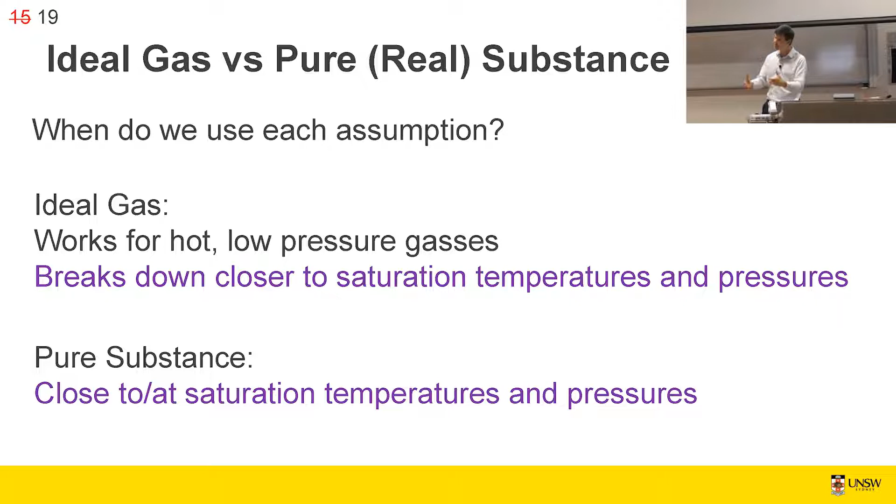We consider water a lot, A, because it's very important from an engineering standpoint, and B, because you have some experience with water. So examples of pure substances: water. I'll talk a lot about water today. We'll talk about refrigerants later.

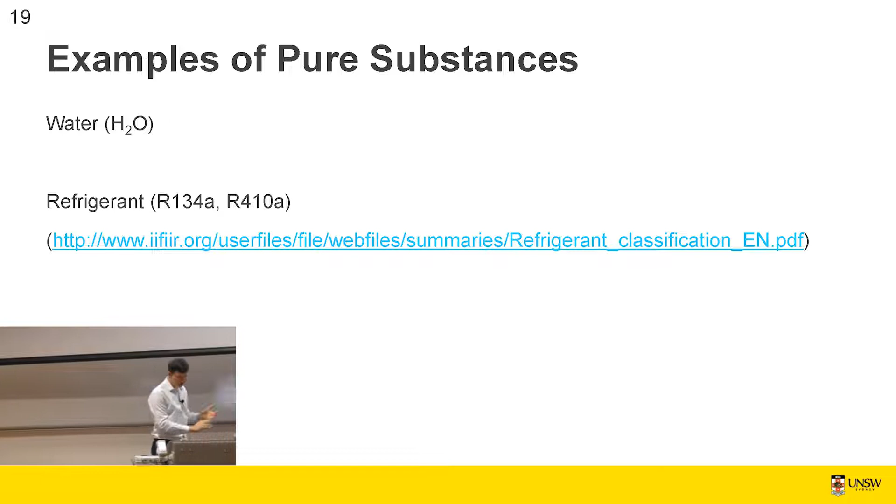But refrigerants, and I've listed 2 of them here, there is a naming guide published by the IIFIIR, it's like the International Institute for naming refrigerants. So they're fun guys you want to invite to your party. But that says what the numbers are. You can reconstruct what the molecule looks like from the R number, and that document would tell you how to do that. We won't really go into that. We'll just use the refrigerant and the refrigerant data as it stands.

So this is liquid. This is water at atmospheric pressure. Okay, so let's do a thought experiment. At 1 atmosphere, let's take water from something cold, and we know it's liquid. At 20 degrees, we're going to add heat in the form of a very powerful candle. And we're going to go from 20 degrees C to 100 degrees C. Okay, and through this transition,

The water is rising in temperature and it's slightly increasing its volume. Water gets slightly less dense as you go from 4 degrees C up to 100 degrees C, but it's still water, okay? Then we're going to keep adding heat, and like my kettle on the floor, the water is still at 100 degrees C, but we start to boil off some steam, and this steam is also at 100 degrees C. Okay, so you've got 2 phases.

So this would be called the point of saturation. This would be called a mixture. This would be called a compressed liquid, or a supercooled liquid. It's in a supercooled state, but we often say compressed liquid because it's not very cold, 20 degrees, so it can be a confusing term.

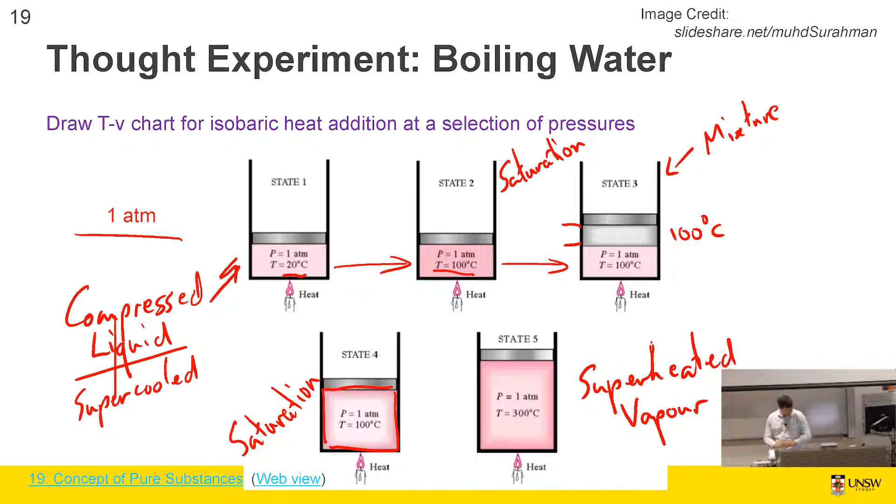So if we looked at that on a T-v chart, temperature and specific volume, cooler, good. So where do we start? We started at 20 degrees C. The density of water is around about 1,000. So the reciprocal of density, being specific volume, is around about 1,000th.

So my chart just happens to be appropriately, the axis is appropriate. Now, when we increase, so we're adding heat, right? We're going to start at this state point, down here. We're going to add heat, and it's going to slightly expand. So the specific volume is going to slightly increase, the density is going to slightly decrease. Probably not even that much, till it gets to 100 degrees, right?

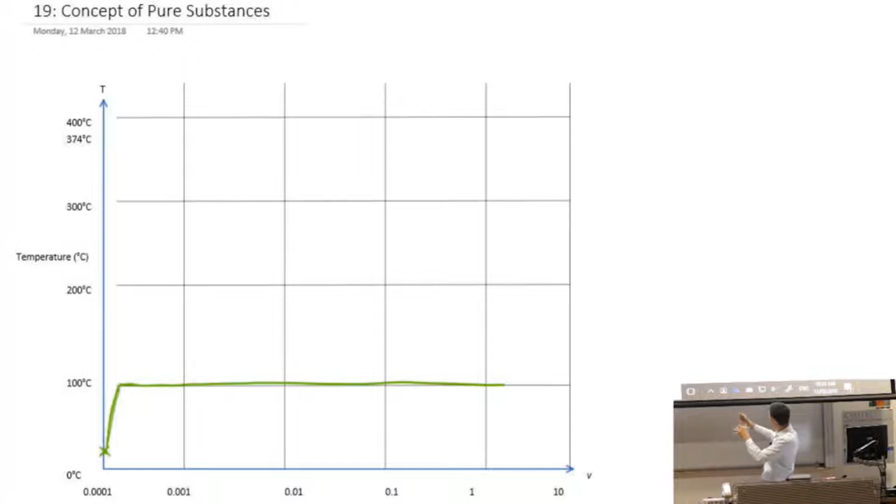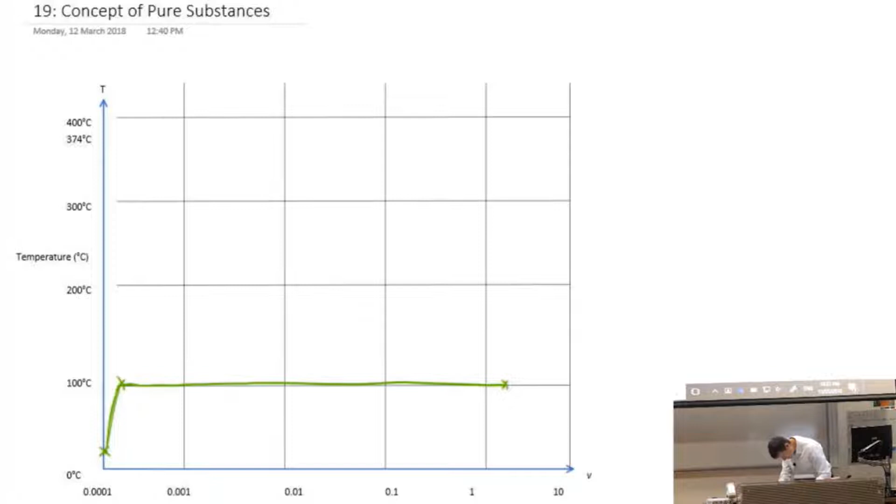And then it's going to expand, and indeed, so this is logarithmic on the x-axis. It expands all the way up to about 2. It expands a lot, and that's important too. And then, so this is our point of saturation again, our points of saturation. And then as you add more heat, the temperature rises, so we're no longer constrained to be 100 degrees. The temperature rises, and it also expands, continues to expand, and does something like that. On a logarithmic chart, it's a bit hard to get right.

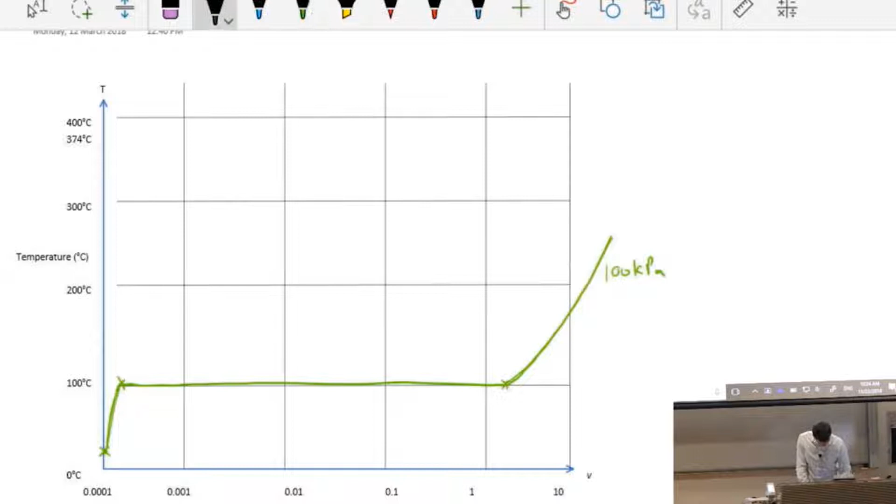What would happen, so we'll draw that. This is an isobaric process at 100 kPa. What would happen if the pressure wasn't 100 kPa, but was instead 1 megapascal?

If you take liquid water at 20 degrees C from 1 atmosphere to 10 atmospheres, right, so we've increased the pressure by tenfold. It compresses. Does it shift it up? You're getting good, you're getting close. It compresses just a tiny bit, but not very much, all right?

It follows a pretty similar line, just a little bit to the left, but a fascinating thing happens when it gets to 100 degrees. And that is nothing at all.

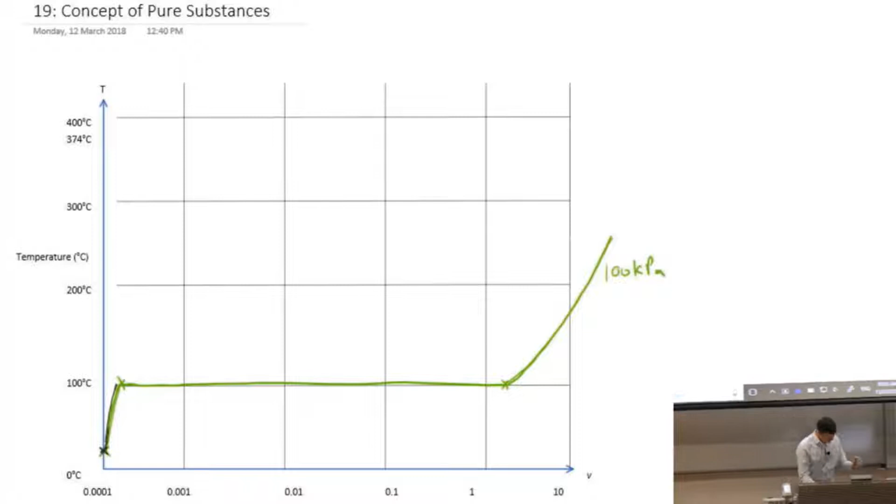Liquid water, so we're drawing a 1 megapascal line here. Liquid water at 1 megapascal continues up to about 180 degrees, and then it starts to boil. And it has a boiling line that goes like that, okay? And then, because it's so highly compressed, it's not quite as big when it's all boiled, and then it goes like that. Is anyone surprised by that? Did anyone know that?

Yep, good, all right. There's an interesting video, it's too long for me to post, it's like 9 minutes long. But it's guys who boil water at various points as they climb Mount Everest.

And you get the opposite effect. So at base camp, water boils at 80 degrees C, right? And that's related to atmospheric pressure as it changes.

Now, you could imagine that then at 10 megapascals, let's draw a 10 megapascal line. At 10 megapascals, you get a very similar point there. It follows a very similar line up here. Let me refer to my textbook. I've forgotten. Cool, no worries.

And then, at 310 degrees, nominally, the water starts to boil. Boil, boil, boil, boil, boil, all the water's boiled. Saturated mixture between those 2 points, and then it goes up. And that's your 10 megapascal line, MPa.

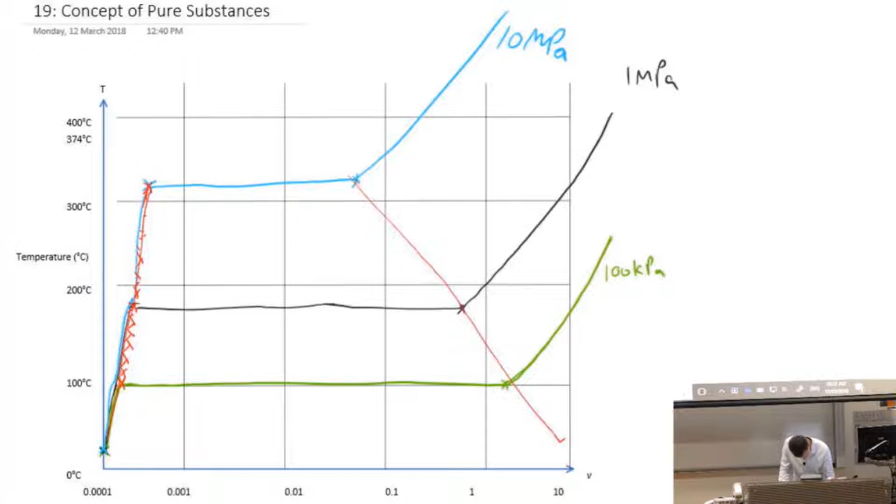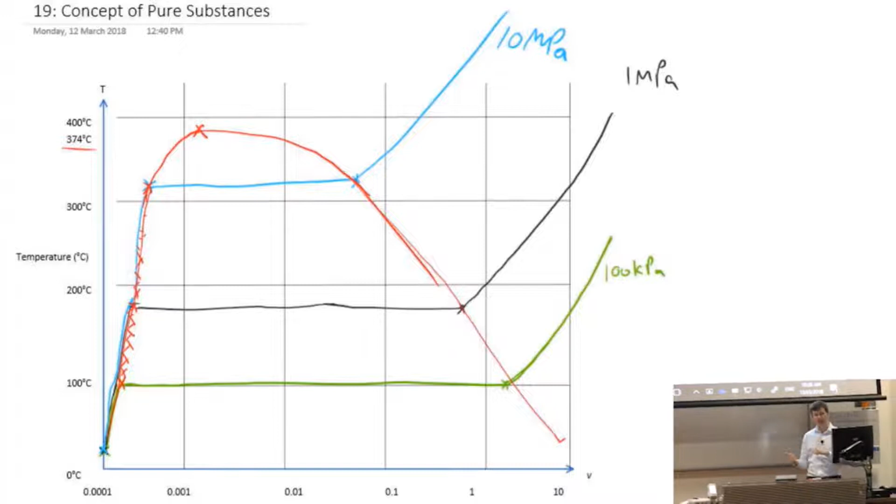In fact, those lines intersect, and what kind of chart has 374 written on it? That's just weird. And in fact, they look like that. I'm going to cut across to a more professionally drawn version of this, but I wanted you to see how it's developed. We'll talk about why pressure influences the boiling temperature of water as we go on. I'll tell it to you a number of times in different ways in the hope that it becomes intuitive.

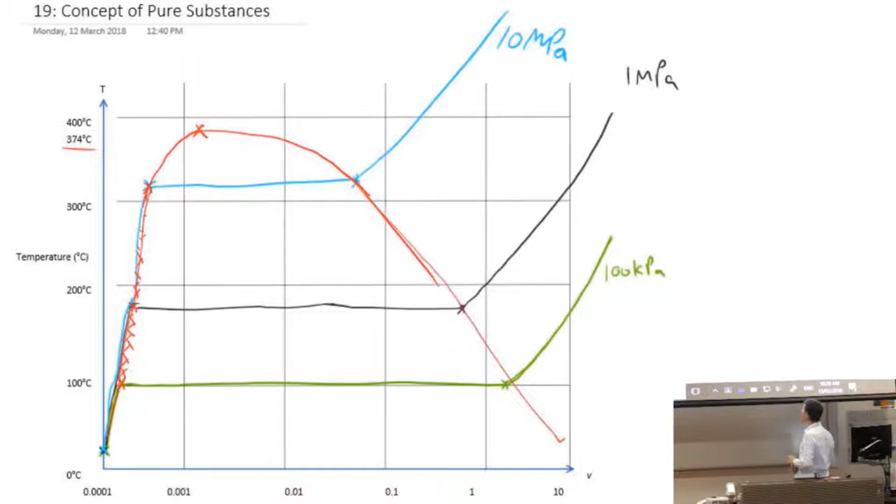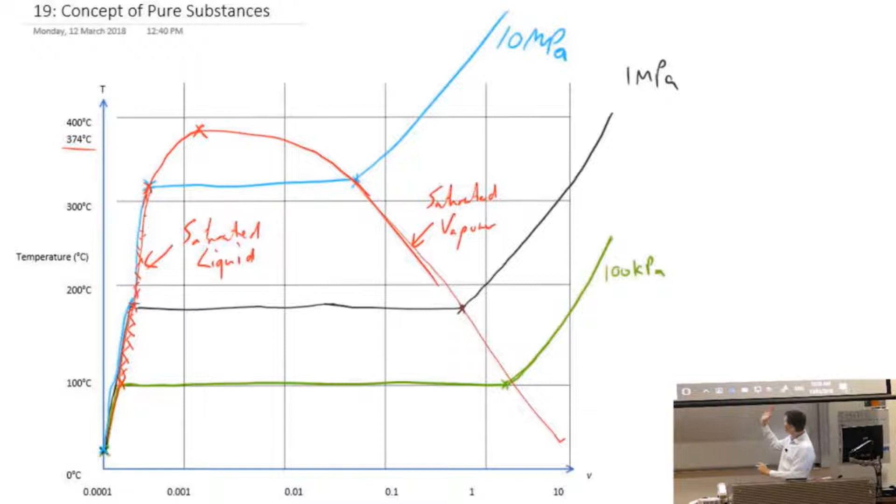This line here would be the line of saturated vapor, and this line here would be the line of saturated liquid. To the left-hand side of that line, it's all liquid. To the right-hand side, it's all vapor. This would be the zone of mixture, where some of the substance is vapor and some is liquid. We'll talk about that point there, and there's a line down here we'll talk about as well.

Excellent. Are there any questions, thoughts, concerns, comments? Go. Why does it shorten? Why does it shorten? Yeah, no worries. Yep, I agree.

So the question is, the length of this line gets shorter as the temperature gets higher, right? Because this is temperature. The reason is the length of that line is the difference between the density - specific volume, but I'll use density since we're more familiar with it - of the liquid water when it boils and the density of the vapor when it starts to get superheated. If you imagine lots of pressure pushing the particles closer together, then even as a vapor it has a higher density. This direction is higher density. And so vapor at 10 megapascals, as it approaches all being vapor, is pushed together, so it's there.

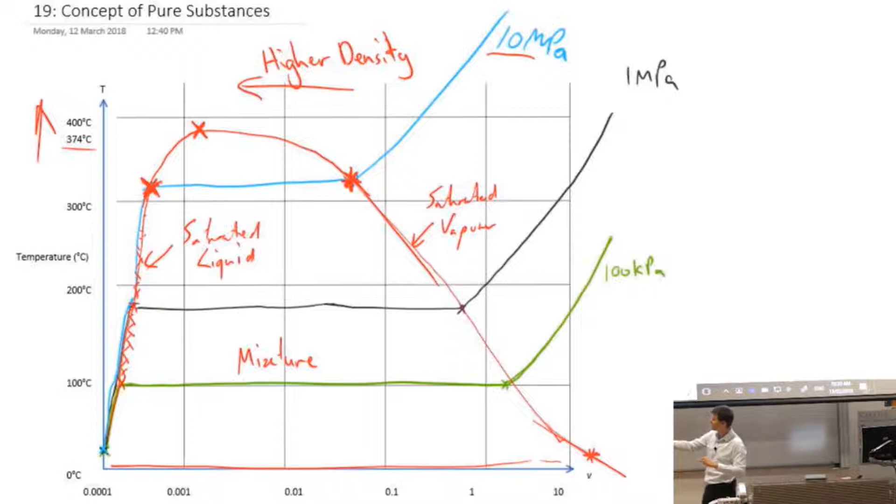The alternative would be at like 5 kilopascals - I'm talking absolute pressures here, not gauge pressures - so we're talking 95% evacuated vacuum. You could imagine that water vapor actually is quite rarefied; it's not very dense at all at the point it becomes vapor. So yes, that line shortens, and it has implications for us. The length of that line is a representation of the energy required to boil the substance as well. So that becomes important. Good question.

And also? Oh, no, let the lad behind you talk because he rarely talks. Why are you starting at 0.0001? 1 over 1,000 is 0.001? Oh, because I'm not good with logarithmic charts.

What? Did I mention we were going to go to a professionally drawn chart? It's a good question, thank you. And your question was the same thing? No, what happens above the graph? Good question. What happens above the graph?

Right, so at a temperature of about 374, 374.14 from memory, you get to what's called supercritical. This point here is called the critical point, which I'll denote CP, critical.

Let's talk about atmospheric air. At atmospheric temperature, you can't compress atmospheric air enough to make it a liquid. So there is a temperature above which - for water it's 374.15 - no matter how dense you make it, going to the left here for higher density, those molecules have too much energy to bond as a liquid. Above this temperature is called supercritical, a temperature at which, no matter what density, you'll never get liquid water condensing out of your substance. So in fact, the compressed liquid region is below that line, and the vapor region is this region inclusive of the space above here. It's a good question, that's the answer.

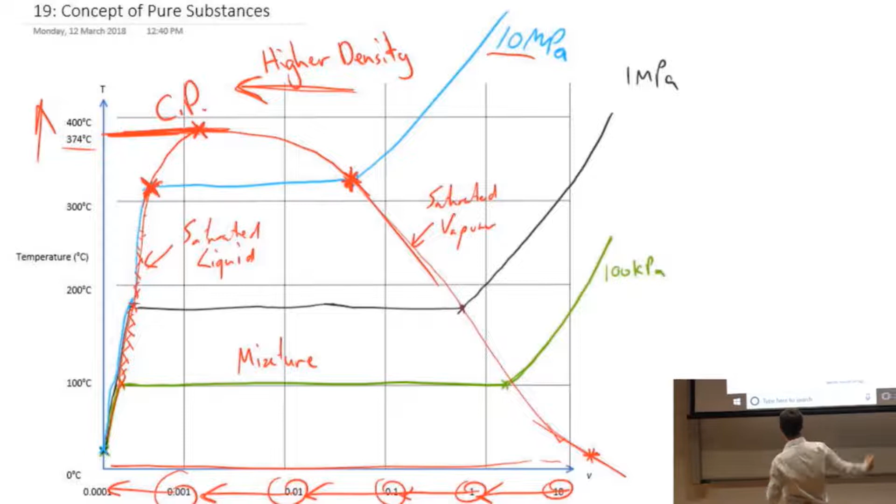What happens up to the right of the chart? No worries, yes you're right, it's logarithmic. So out here in this space, you need to be really low pressure to get there.

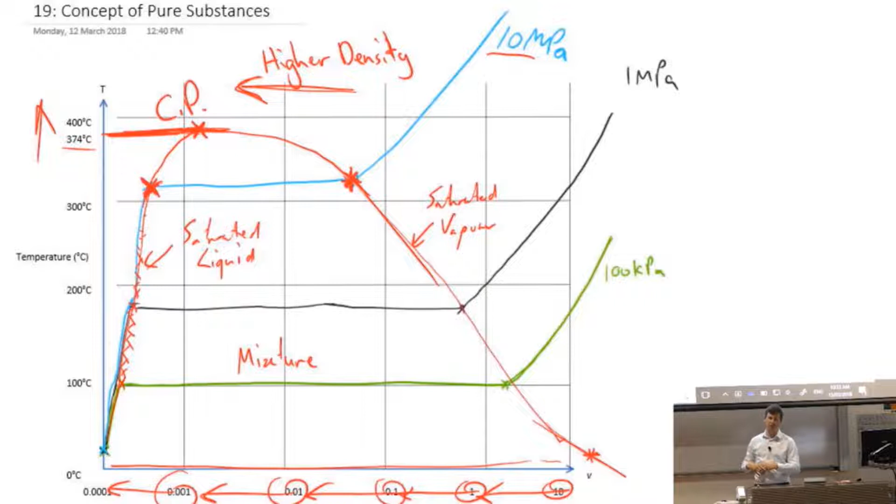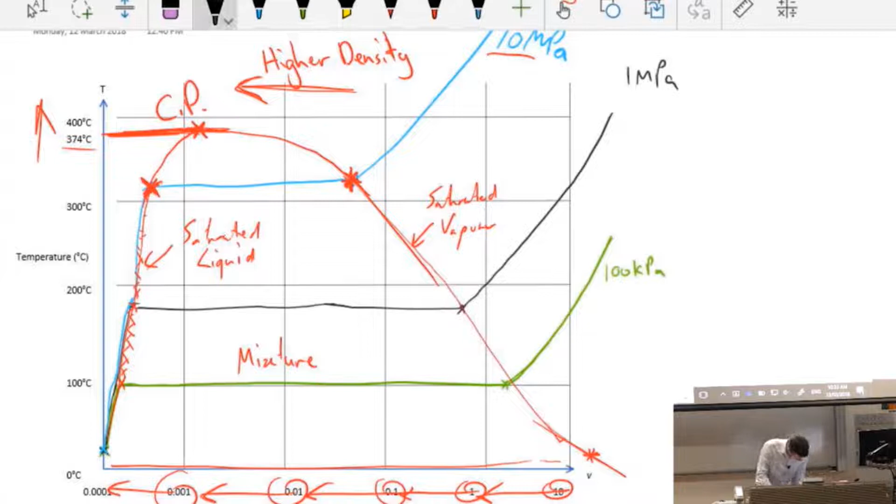If we did a 5 kilopascal line, I feel like I should do a 10 kilopascal line instead, because that would be an order of magnitude below our 100 kPa. If you did 10 kilopascals, it would look like that, it would go there, and then like that, and that would be 10 kPa, okay?

To start to get into this region here, so you've got really low density at really low temperatures, you need quite an extreme vacuum, right? And I guess there's some, well, is there some sort of limit? No, you just get really rarefied air at low temperatures. That's low density, low temperature.

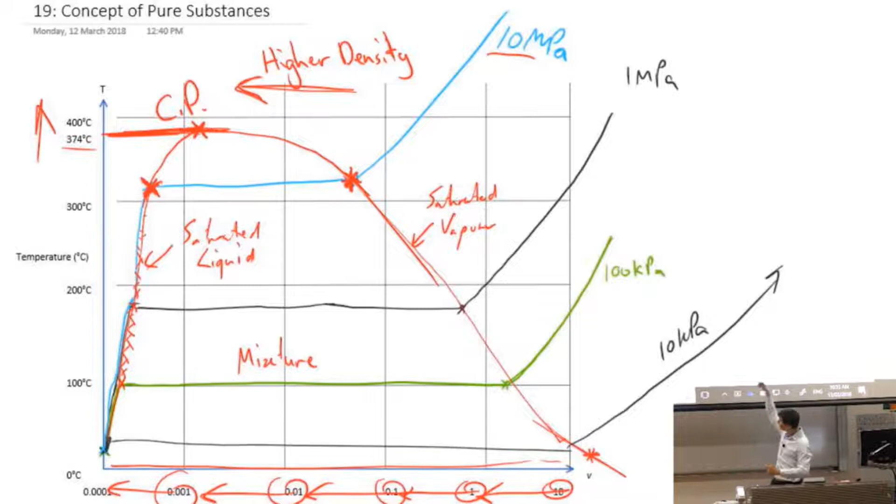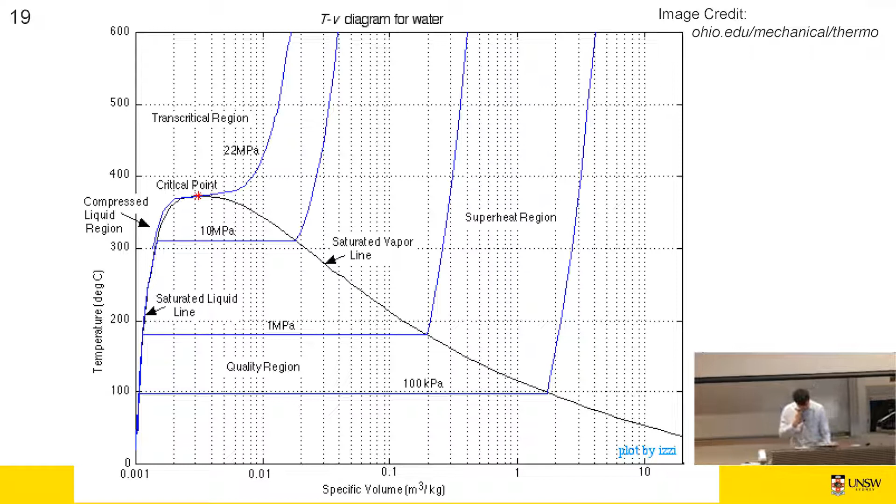It's a good question. This is a chart drawn by someone else using a computer, so I would suggest that everything's a bit better. Oh look, he starts at 0.001 - that's just, you know, he knows how to divide by 1,000.

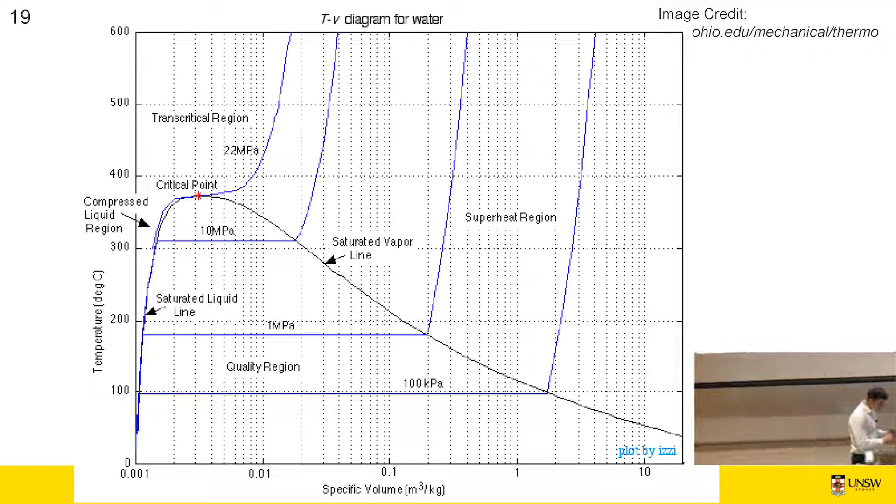So it's the sort of thing that we've talked about, right? I just want to point out a few things, okay? So subcooled or compressed liquid. Subcooled meaning if you add a little bit more heat, it's not just about to boil, and that is the region off here to the left. So anything there would be called subcooled, right?

Saturated liquid, and indeed the saturated liquid line is so labelled here, is the line describing when a subcooled liquid becomes saturated. So it's just about, if you add any more heat, it's just about to boil off some vapour, okay?

Quality region is in the middle here. We can call that a region of mixture, or the quality region, because if you look at the length of this line, from that point to that point, you have some point along that line - let's arbitrarily choose a point that occurs at 100 kPa.

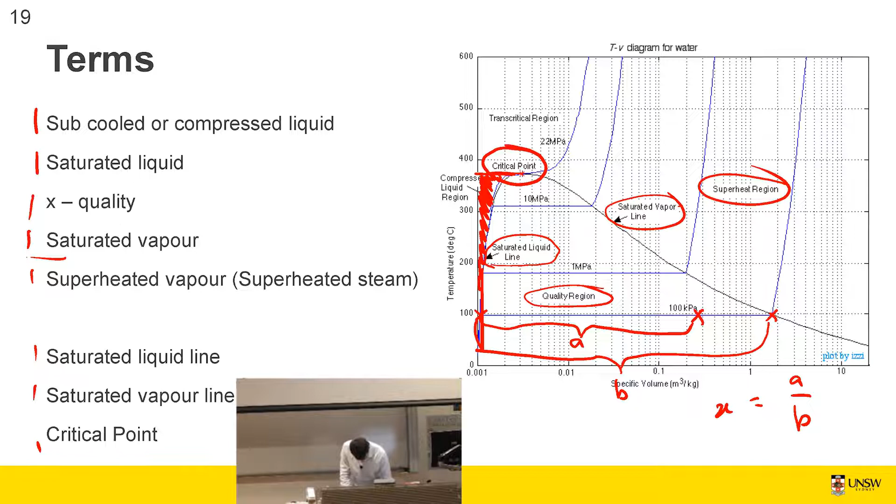If you divide that number - this is length, length in millimetres if you're reading a chart - if you divide this number, let's call it A, by B, x equals A divided by B, right? Then x, and x is the letter that's used, all right? I'm not making this up, x is the letter that's used. We will define x as the quality of the mixture, okay?

So if A was almost the same as B, then the number would be about 1. If A was really, really short, then the number would be about 0. So x is bounded by the numbers 0 and 1. We'll talk about quality soon. But where the substance is along that line is quality x, and we use it as an intermediate variable for some of our calculations. Cool.

Superheated vapor is this superheat region up there. Sorry, my apologies, that says saturated - saturated vapor line, superheated vapor is the region over there.

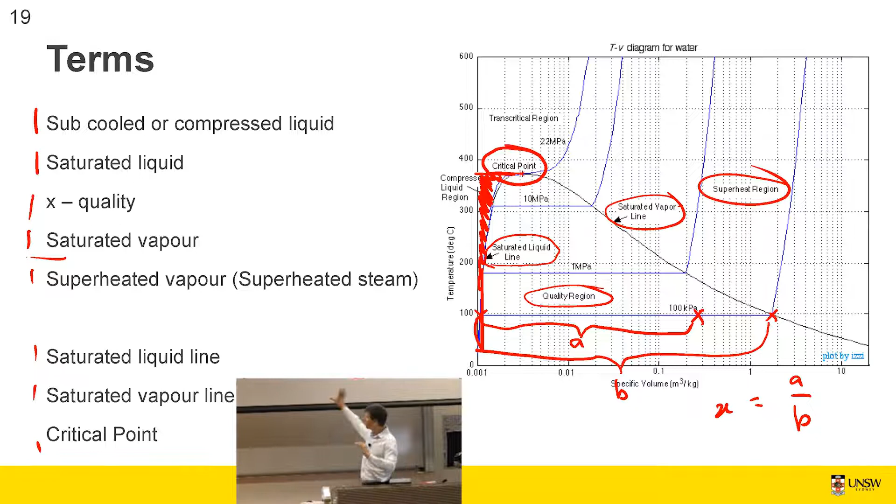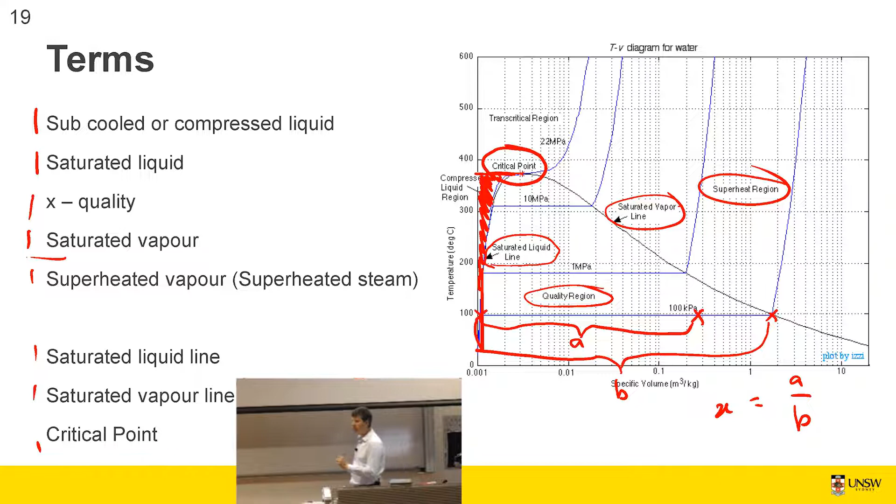We talked about the lines, and we mentioned the critical point as well. The critical point is so labelled on this graph up the top. It's the temperature at which any higher temperature cannot be compressed into a liquid at all.

Excellent, just a more formalised version of that. I want to tell you stuff a couple of times.

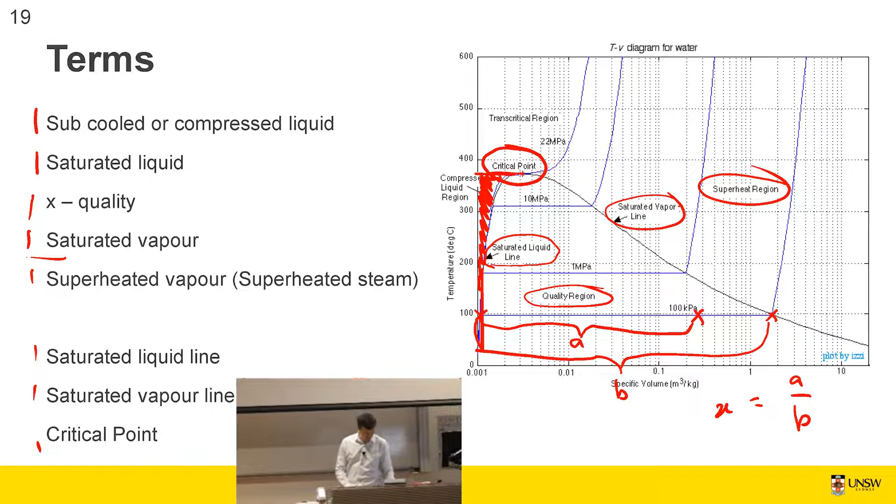If we did something different, if we took water at 100 degrees C, okay, so this is isothermal, and we compressed it from 50 kPa, so it starts as rarefied, so it's all superheated vapor. Notice that the word superheated means it's all vapor. 100 degrees C, you're like, that doesn't sound superheated - no, it's a defined word that means it's all vapor, right?

If we lower this piston to such a point that the vapor is now at 101.3, or atmospheric pressure, at 100 degrees, so now it's saturated, all right?

Okay, question, it came up in the forums. So to have an isothermal process, at 100 degrees C, what needs to happen to heat? If we say that's the first law for closed systems - this is a closed system, all right - what's happened with Q to get from 50 kPa to 1 atmosphere, 101.325 kilopascals?

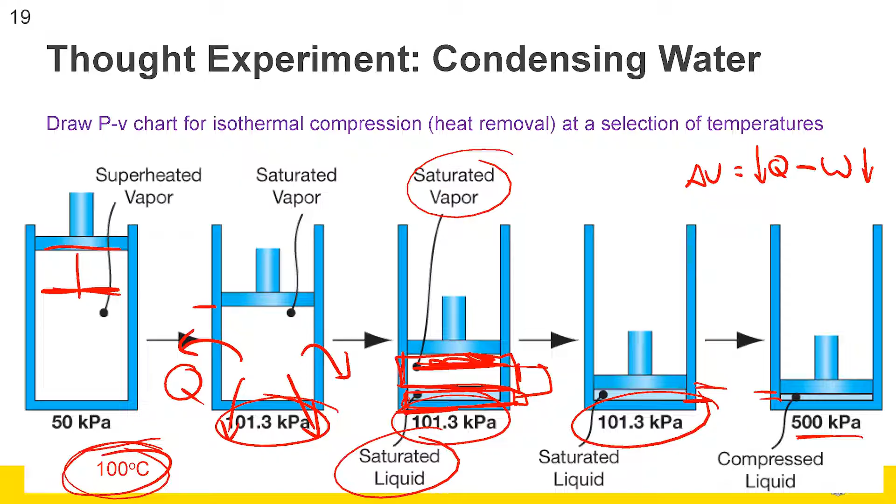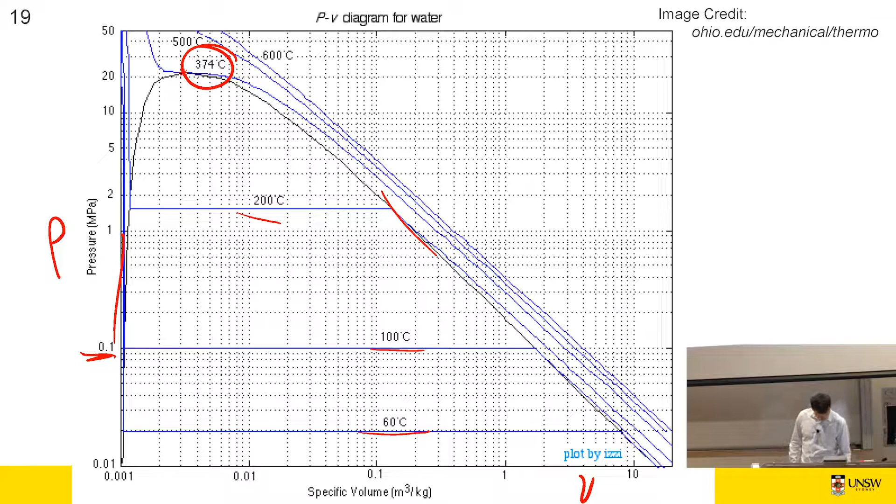So if you did that a number of times at different temperatures, you would get a PV chart - the other one was a TV chart. This is a PV chart for water, H2O, and these are lines of constant temperature. So 60 degrees, 100 degrees - feels like 100 degrees should be about 0.1 megapascal, that feels about right. 200 degrees and so forth, and 374 is so marked. At higher temperatures, you can't get water to compress into a liquid, so that's what we said. Saturated liquid line, saturated vapor line, just a different way of representing the same information.

So, man, what we need is like an equation of state, right? Because last week was so simple: PV equals MRT. Is there an equation that is just so framed for water, H2O, because we'll use that as a representative of all substances?

It exists, and I invite you to read that paper - I couldn't get past the preamble. That is by the International Association for the Properties of Water and Steam, I think. They invite actuaries to their parties to liven things up - that's a joke, right? Anyway, so there is, and it's got about 60 terms in it, right?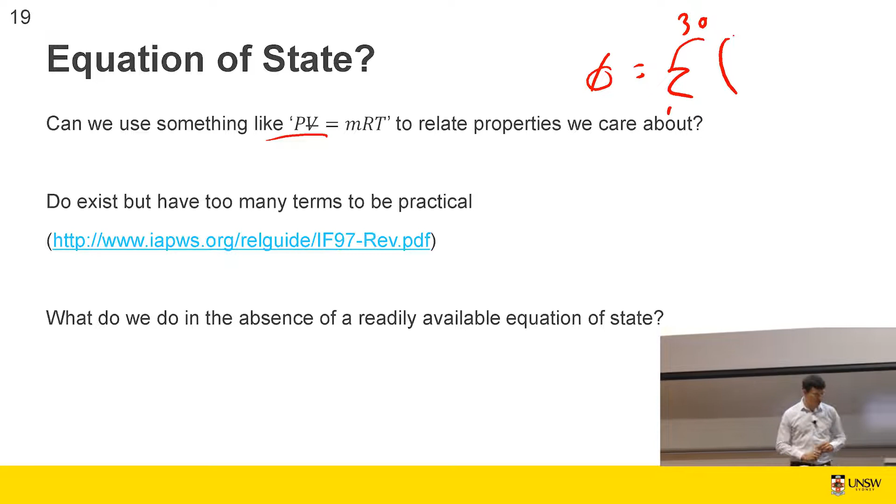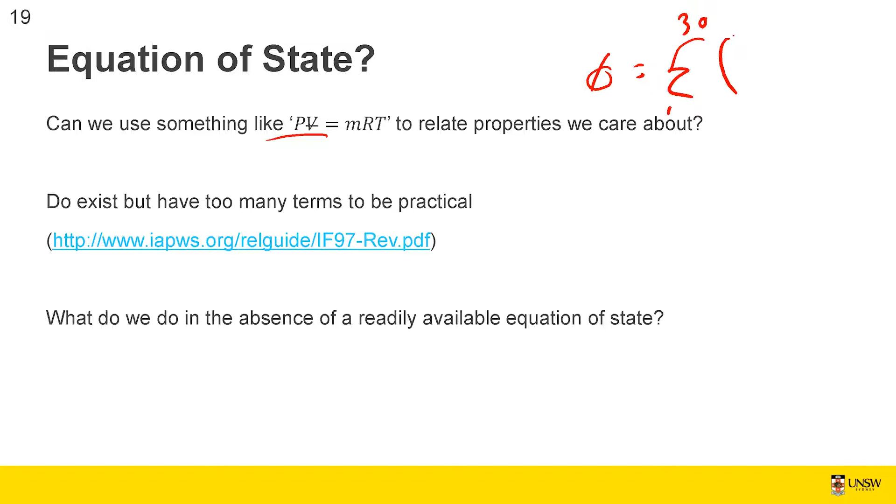So it's not PV equals something, all right? It's phi equals the summation from 1 to 30 of... anyway, you can open up and have a look. So for our purposes, we won't use the equation of state. If you're programming this in a computer, you would potentially use that institute's definition of the equation of state. So what do we use in the absence of an equation of state? Well, as engineers, we look up property tables, and it's wonderful, it's great - far better than trying to solve it.

This is table A6 in your textbook. So I brought my textbook - the publisher gives me a textbook, so it's hard for me to say I encourage you to buy a textbook, except to say you're doing this for 6 months where I teach you how to use a textbook. The resource is potentially valuable afterwards, but that's okay.

So this is table A6. You can see this is tabulated exactly what we've just seen on the charts - I want to try and make that connection with you. This is temperatures running from 0.01 degrees C, and a very low pressure, that is 611 pascals. So we're talking about 100 kilopascals, right? You're going out of the kilopascal range, down into the pascal range - that's 611 pascals.

Through to - and the temperature will go all the way up to 374.15, and a pressure of about 22 megapascals in the table. Cool. So this temperature and pressure define - you know how when we did the compressed liquid example, I said the temperature is staying at 100, the pressure is staying at 101.325, but the volume is changing and we're losing heat. Okay, so this is the temperature-pressure couplings.

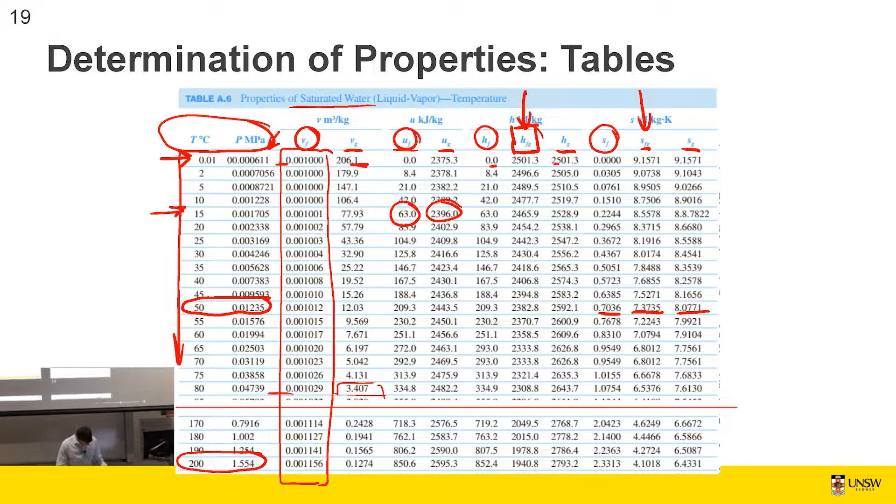What's the boiling temperature of water? It depends. You can get water to boil all the way from 0.01 C. You can't get water to boil below that, and we'll talk about that as well. And you can boil water all the way up to 374.14 degrees C. You can't get water to boil above that temperature because it's already supercritical. The answer is it depends.

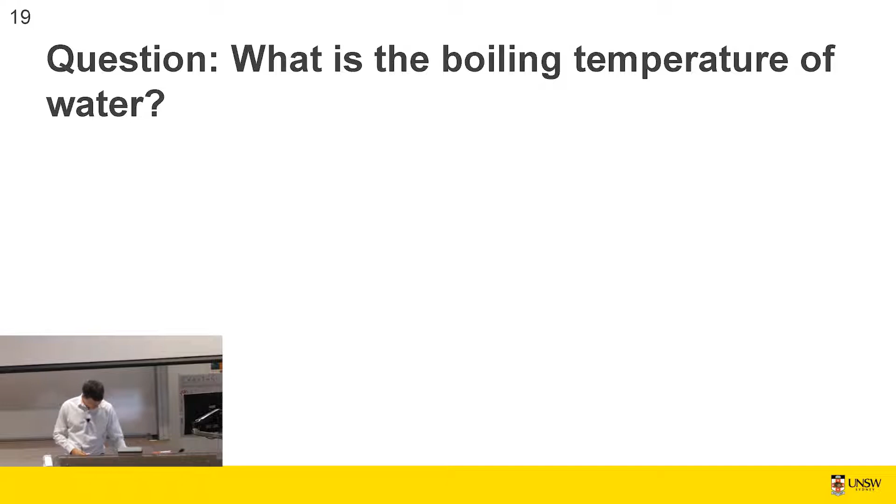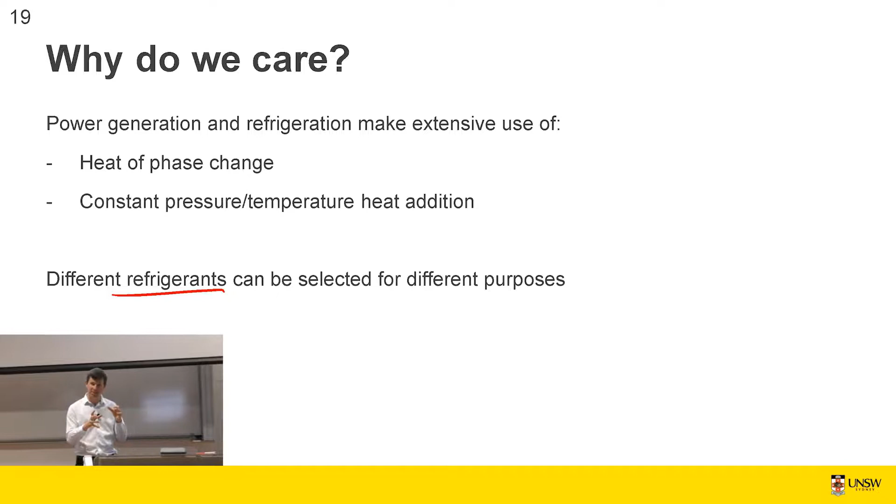Why do we care? Boiling water is a big deal for thermodynamics. We've talked about power stations, steam power stations. We use a lot of it to generate electricity. That heat that it takes to boil water, we exploit that quite often. And we talked about water, but we can use different refrigerants. We can select a chemical that has a different curve for a given purpose later on.